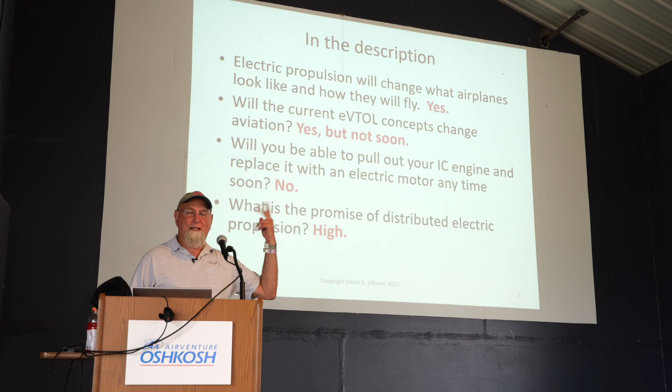In the description, I posed 4 statements, and I'm going to tell you the end so you can leave now if you want to and go do something more useful. But I said electric propulsion will change what airplanes look like and how they'll fly. I think the answer to that is a resounding yes.

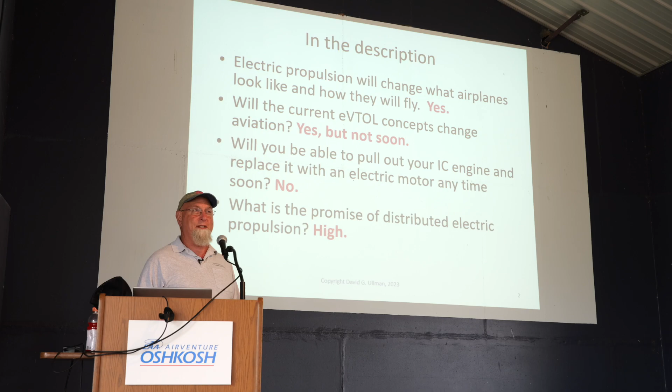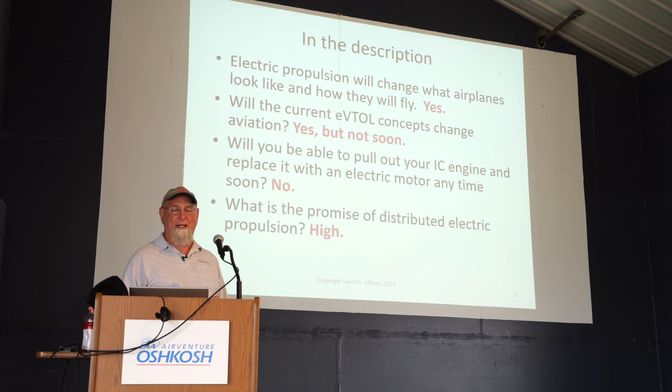Will the current eVTOL concepts change aviation? Yes, but not soon, and I'll explain why I say that. Will you be able to pull out your IC engine and replace it with an electric motor anytime soon? Well, you can sort of do that, but you don't go very far.

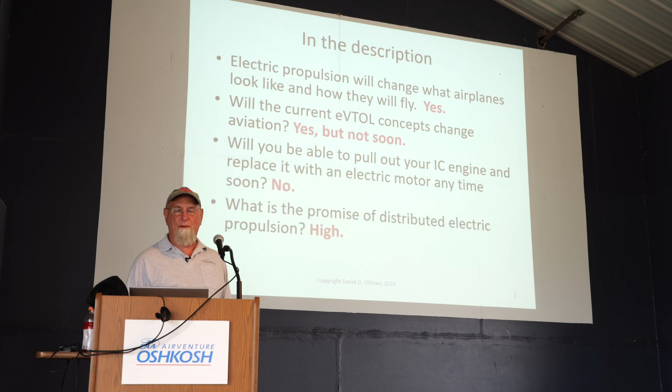And what's the promise of distributed electric propulsion? What I should have really written there was propulsion airframe interaction, because that's really where my hot spot is, as you'll see as we go through this. I'm going to make a lot of predictions.

My background: I've got degrees in aerospace, a PhD in mechanical. I worked at the Flight Dynamics lab way back when Orville and Wilbur were still there. I write textbooks on stuff, and I started playing around with electric aviation in 2009. I've been working with CubCrafters, and we'll get into that project a little bit, since 2019. I've written a number of articles, and I was a keynote speaker in 2018 at the Cafe Symposium, and some of this material is actually from that 2018 talk because basic science has not changed in the past 5 years.

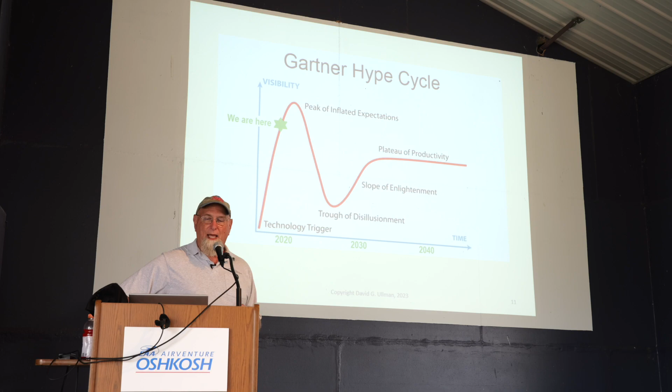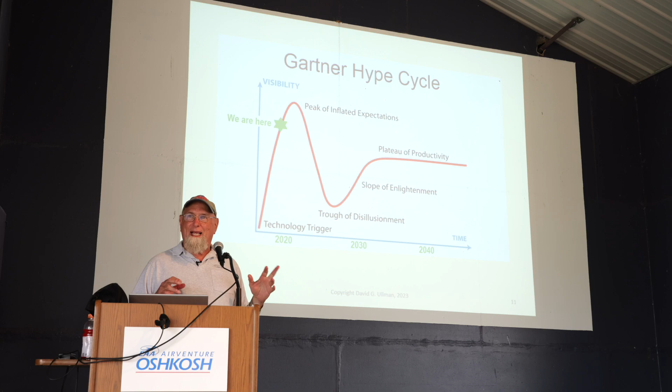And the reason I put hype is this is one of my favorite diagrams. It's by Gartner, a research organization, and the Gartner hype cycle is fairly well known. It pertains to just about any new technology. It says initially there's going to be a peak of inflated expectations. We can do everything, we can save the world. And then, of course, reality sets in as you really try to build it and make it work, and you end up in the trough of disillusionment. Then you slowly get enlightened and you come out someplace with a plateau of productivity. This may be fairly low, it may be fairly high, you just don't know.

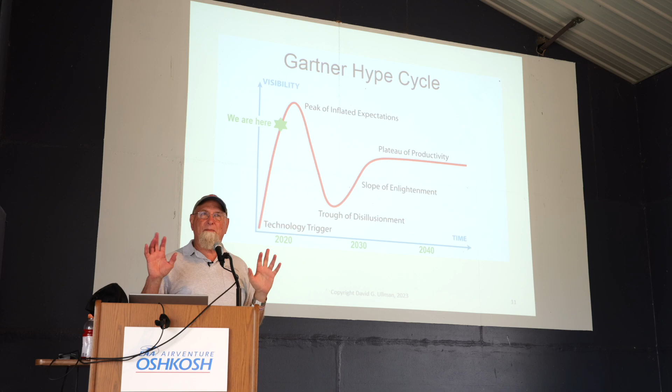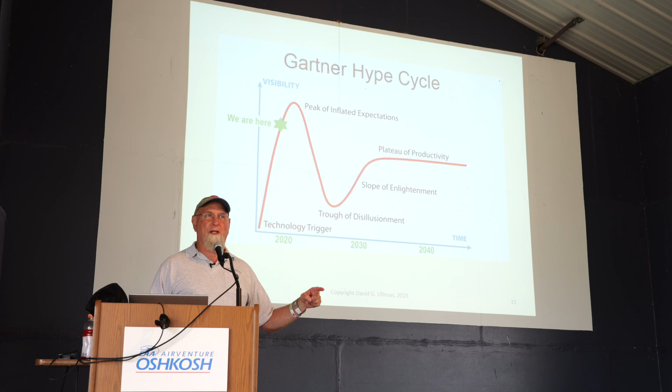I think overall we're at someplace near the top of the inflated expectations. And the stuff that I'm working on, which is propulsion airframe interaction, is actually much further down that slope, because people have just barely started looking at it. And I'll make that clear. So this is where the title comes from, and this is what I think's happening.

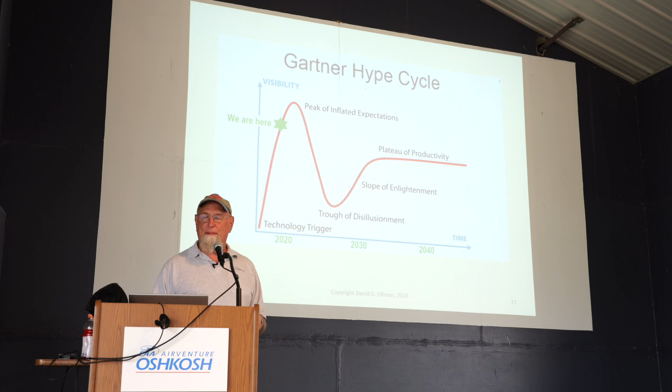By the way, if you go to www.davidullman.com and then go to my Aero tab, you'll find most of this information. People are looking at all kinds of different missions. UAM is the big push, which is now called Advanced Air Mobility, and both terms seem to be used. STOL enhancement is an area that I'm working on a lot now. Humanitarian missions involve getting in and out of tight places to bring people and goods in and out. People are looking at sport, we'll show that, and of course the military has lots of missions.

On the UAM side, Uber published this list, which goes over two slides, of what UAM means to them. This was published about six years ago, and at first I looked at this and I said, you know, this is a really dumb mission. Then the more I thought about it, I thought Uber did a really good thing, because they stuck a stake in the ground and said, here's something we can try to achieve. Be it realistic or unrealistic, who knows, but here's something we can try to achieve.

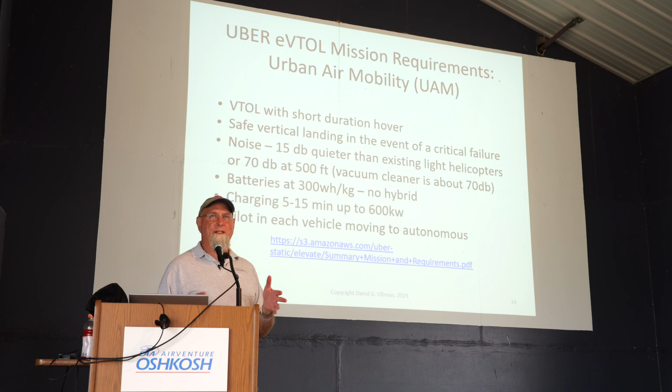One of them I want to point out in particular is the fourth one. They said that they thought at the time it would take batteries at 300 watt hours per kilogram to make this happen. Now, batteries, you've got to talk about how much energy is in a battery per unit weight. I'll get to that again in just a second, but 300 is still ambitious and we're still not there.

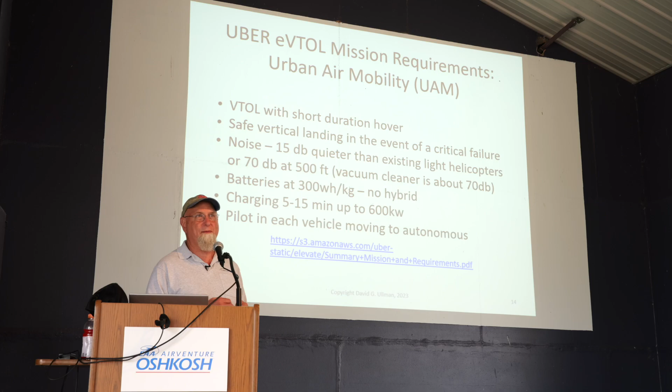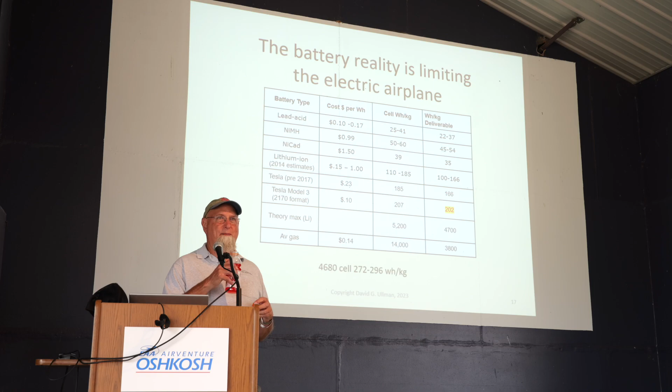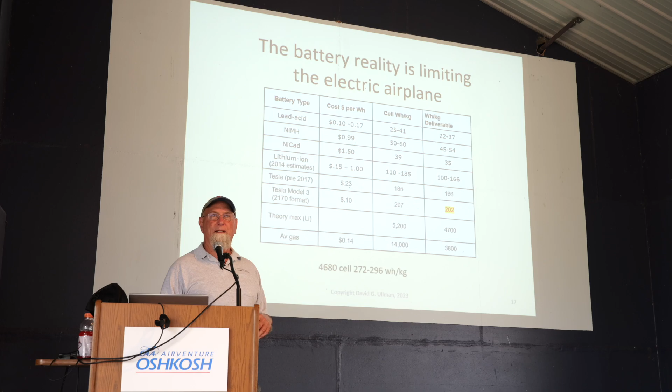You might notice that avgas is much more than an order of magnitude more dense in energy. You might also notice that the theory for lithium is an order of magnitude higher than where we are now. Keep in mind, battery research for running cars stopped in about 1905. As soon as the electric starter was developed by Bendix, electric cars went away. So we've had IC engines being developed for 130, 140 years. Battery development stopped for vehicles and then didn't start up again until the last 20, 30 years. So it's still early days in developing really good batteries.

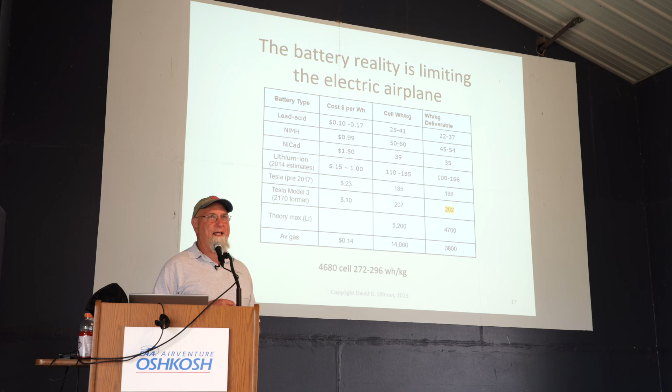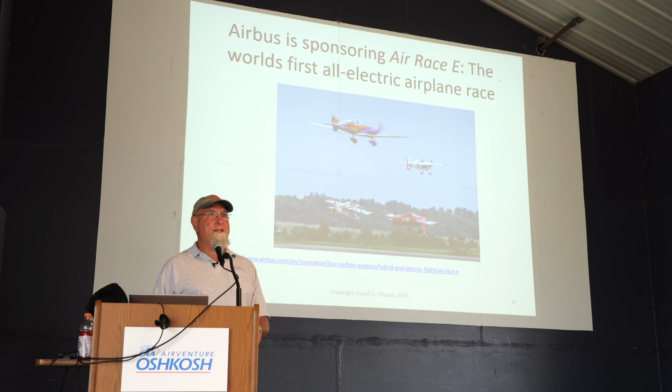Airbus is sponsoring the electric racers. This is a really good mission for electrics because they only have to stay up for 20 minutes, 15, 20 minutes. So you can just suck a battery dry to do the mission, and you're done. You can come down, recharge, swap the batteries out.

I don't know how this is coming along, I haven't seen them announce anything. Pipistrel, which doesn't have their own booth here this year, seems to be in a number of different booths. They've been marketing the Alpha Electro, which has about a 50-minute range, and they're selling it as a trainer. That's about right because typically you take somebody up for an hour in training. So they found a nice niche for taking out an IC engine, putting in electric, and saving money.

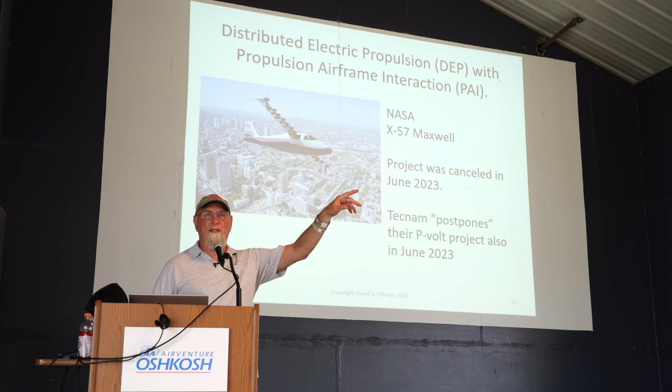One of the big pushes that got distributed electric going is the NASA X-57 Maxwell. To some degree, it does propulsion airframe interaction, meaning the thrust from the motors isn't just pushing it forward, they're interacting with the airfoil to change the aerodynamics. They don't do it in as dramatic a way as I think it needs to be done, but they were doing it. This project was canceled two months ago, and there's a vestige of it over in the NASA tent you can talk to people about.

Tecnam, who manufactured the fuselage they were using, actually had a program where they were doing what they called their P-Volt, and they shelved that also two months ago because the energy densities, they said, the batteries aren't there yet. They're going to shelve this for a while and come back and revisit it.

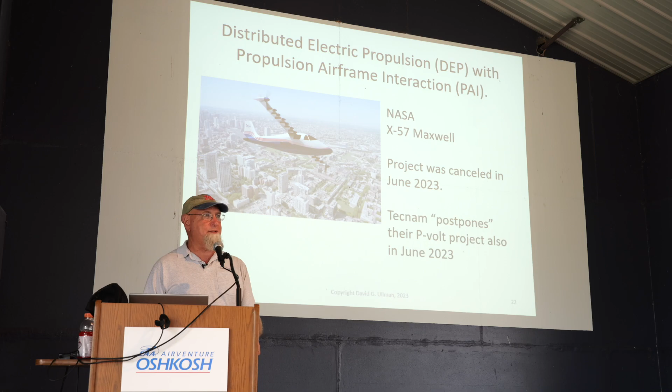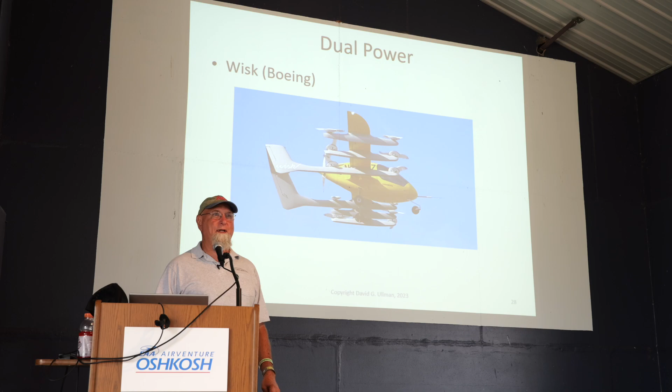There's a lot of them that are dual power. This is the Wisk airplane they flew yesterday, though this is actually one generation old. Wisk has a tent down here with Boeing, and they have another configuration where they've gotten rid of the motor to propel them forward after the fuselage on this. Horizon has another one where they have lots of ducted fans to lift, and their propulsion forward is another propeller in the back. People are doing all kinds of really interesting things. How it's all going to shake out, who knows?

One of my favorites, and I need to preface this, I'm a technologist, I'm a nerd, I really like elegant solutions. I like pushing the envelope of technology. So putting rotors on something to make it go up doesn't really thrill me too much, but doing something clever with ducted fans, that gets my attention. And I think Lilium has done that.

But they've got G1 certification. The European Aviation Safety Agency has blessed them, and they're trying to set up these airports so they can go from city to city doing the UAM.

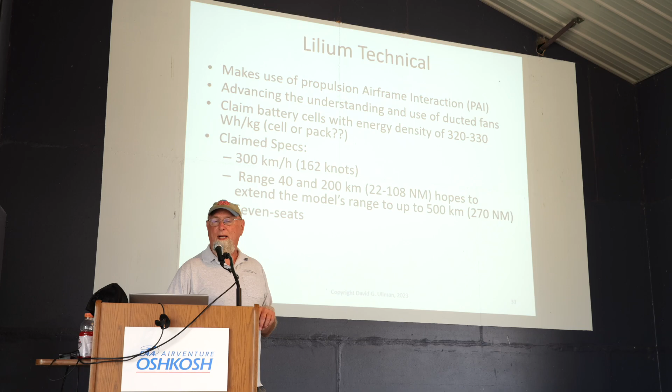What I think is really interesting about Lilium is they do make use of propulsion airframe interaction, PAI. They're pushing ducted fans. You'll see on the various projects I'm involved in, I use model airplane ducted fans because there are a lot of them out there and you can find the most efficient ones and use them.

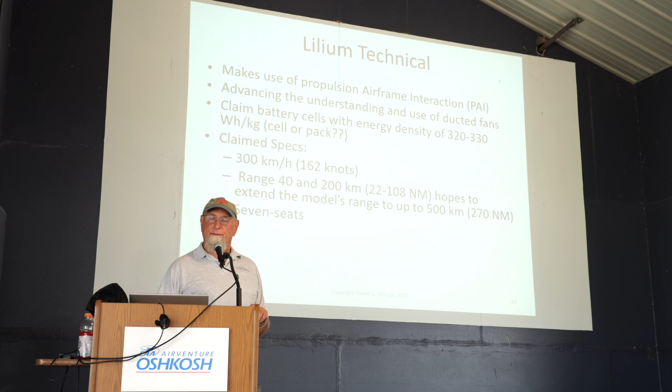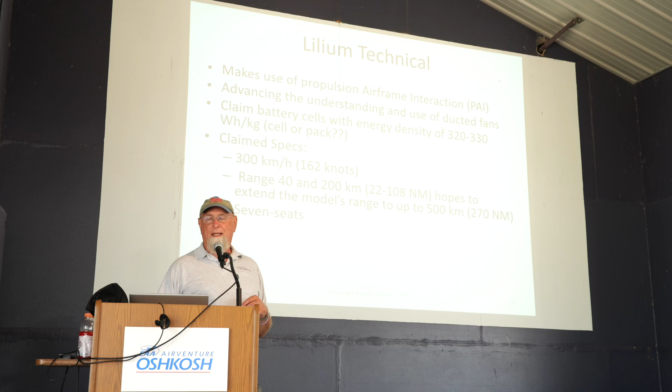They claim their battery cell packs have energy densities of 320 to 330, and I haven't seen those batteries yet. That's all I'll say about that. They claim different ranges in different places. They're shooting for a 7-seater.

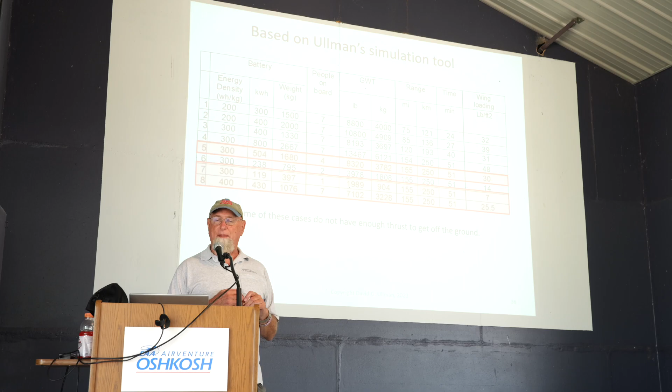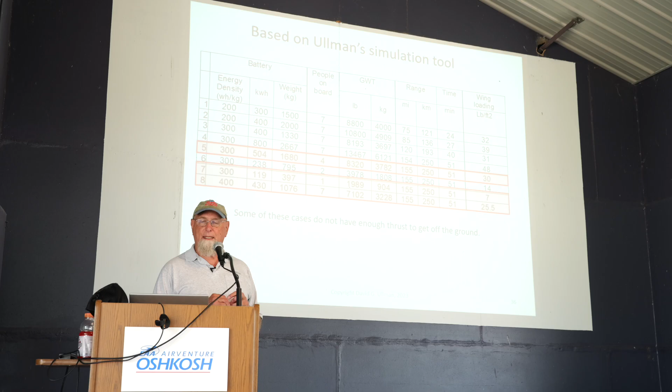Based on my simulation tool, I ran a whole bunch of simulations here. The only ones to bother to look at are the ones in red. The thing to look at is the number of people on board and the range going out. What I was trying to do was get the range to 250 kilometers, because that's what they claimed at the time I did this simulation. You can see it does all 250.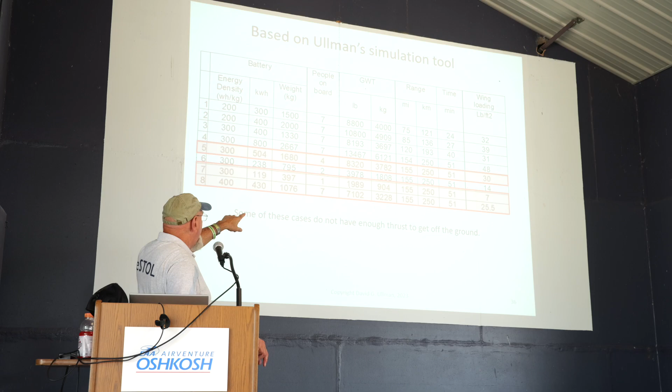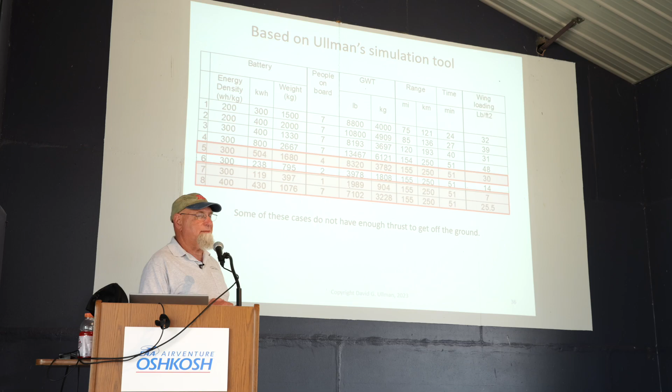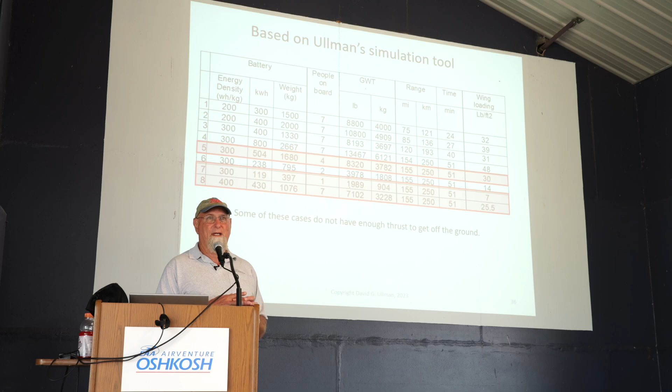But when you come back and look at the number of people and the size of the vehicle they might need with different density batteries—I've got 300 and 400 here—to get to 7 people and that range, you need energy densities of 400 watt hours per kilogram, and we're nowhere near that. So they've had to back down to some of these others that are more realistic. But it's going to come. Batteries were not researched for this kind of application for most of the 20th century, so it's going to happen.

Another elegant solution that's here is the BlackFly, and it's been here for 4 or 5 years. What I find interesting about the BlackFly is they don't rotate anything—nothing moves. The airplane rocks back so you can get it to go up, and then rocks forward so you can get it to go forward. It's a one-place vehicle, it doesn't have much range. It's going to be sold as a sort of a toy, and it's never going to be a real contributor to UAM or any of the other major uses we might have.

So this is my really quick survey of the different kinds of vehicles. There's over 200—I could have gone on for hours about differences between these, but I wanted to give you an overview because it helps with the rest of this talk.

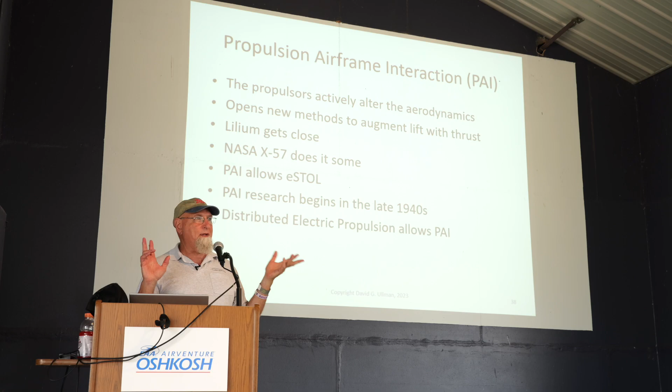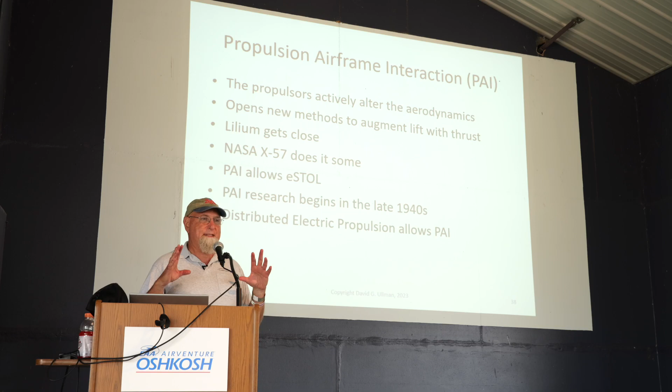So let's talk about propulsion airframe interaction. I've already mentioned it a couple times—it's where the propulsors actively alter the aerodynamics. Keep in mind, you can have little ducted fans or other kinds of thrusters, put them all over the airplane, and put the air where you want it. If you understand the aerodynamics well enough, you might be able to totally change how an airplane behaves. I think this is dramatically under-researched. I think the funding agencies have looked at quadcopters and other things that are technically simple but very limited. I think this is something that's just going to evolve.

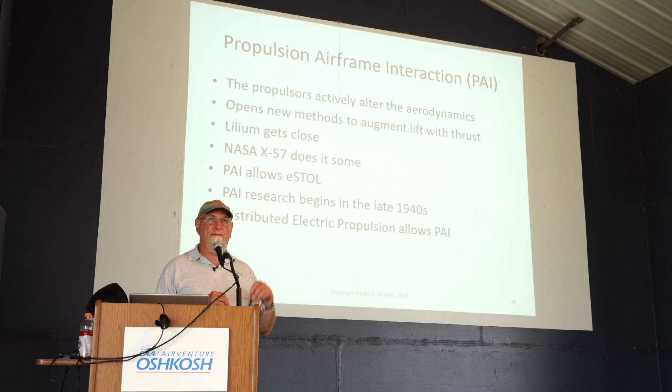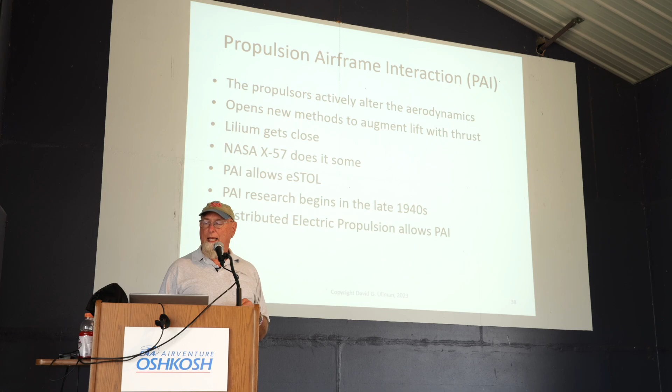Lilium does it fairly well. X57 does it some, allowing electric STOL in ways I'll show you in just a few minutes. And it's actually got some history, so this is not new with us.

The history starts with a guy named Willard Custer. A book just came out earlier this year called The Speed of Air, written by Willard Custer's grandson and a researcher from Georgia Tech. Willard's great quotation is, 'It's the speed of the air, not the airspeed.' What Willard came up with, and he was not an engineer and clearly not a businessman, is that if you take an airfoil and blow air across it, the faster you can get the air going, the lower the pressure and the more lift you can get.

He came up with this because he got caught in a tornado and ran into a barn, and the barn roof lifted off. He said, 'How did that happen?' And that was his great epiphany.

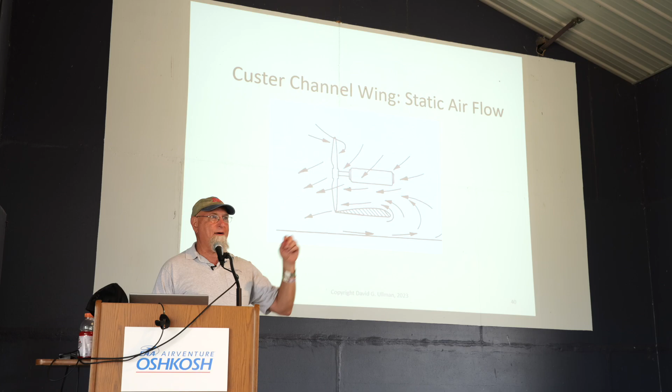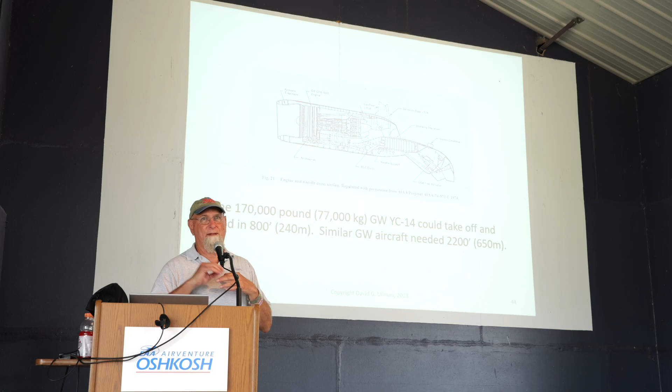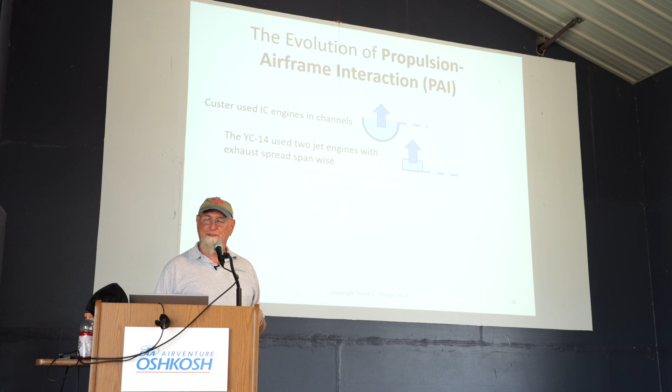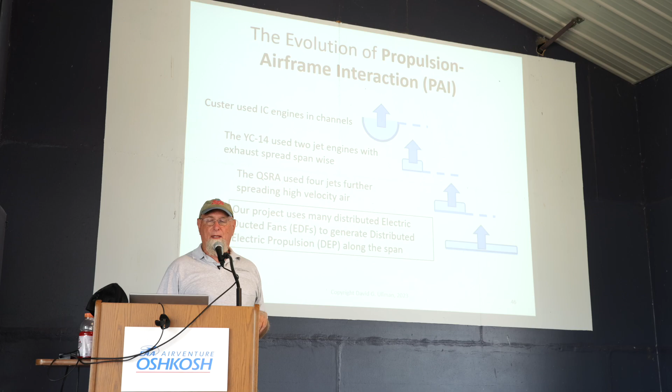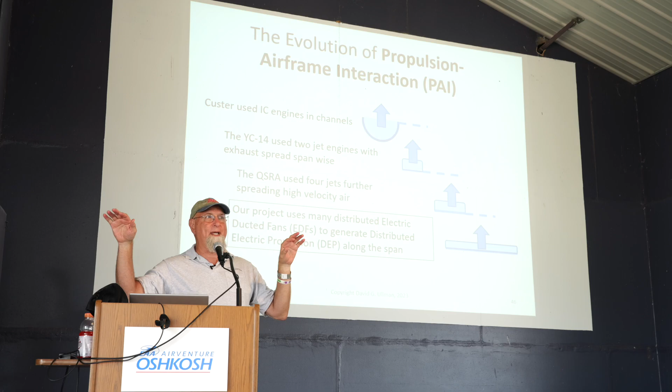What we're trying to do is what Custer tried to create: low pressure and lift in the channel where the propeller was. The YC-14 had a single propulsor inboard. The QSRA had 2 propulsors next to each other. And we're saying, well, if you can play with the whole wing, you can mold how you want the lift distributed on that wing if you do it right. I don't know that we're doing it right, but we're playing and we're making progress.

So this is some wind tunnel results from a couple of years ago, for a 4414, I think, airfoil. The bottom curve is a lift curve slope for just the airfoil in the tunnel by itself. If you're not familiar, this is how much lift you're getting non-dimensionalized versus the angle of attack. Typically this goes up until it stalls - the stall's the peak on the blue line.

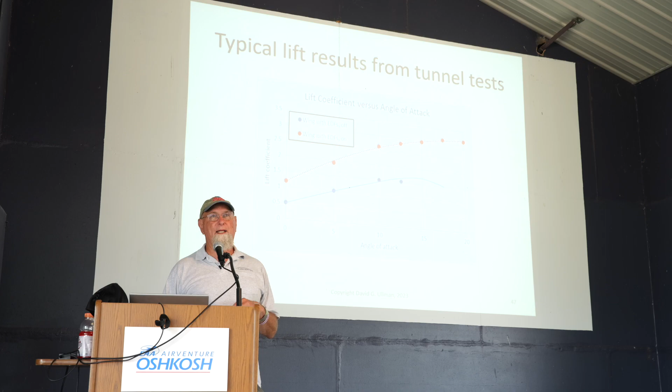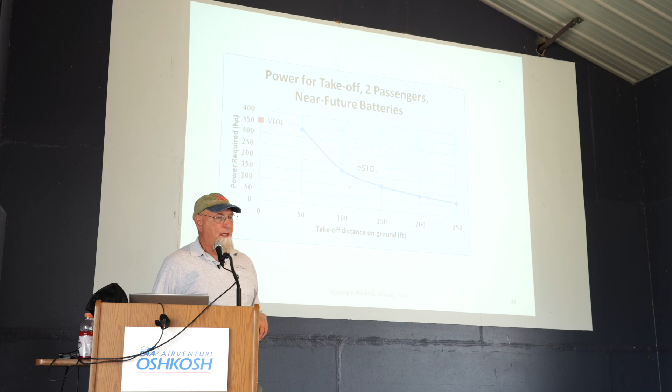There's a big push on this vertical - to get vertical takeoff and landing eats up a lot of power. It's a dramatic amount of power. But if you do a STOL kind of vehicle, where you've got a really short runway, you can use much less power. This is a figure that gives you some idea of what happens there.

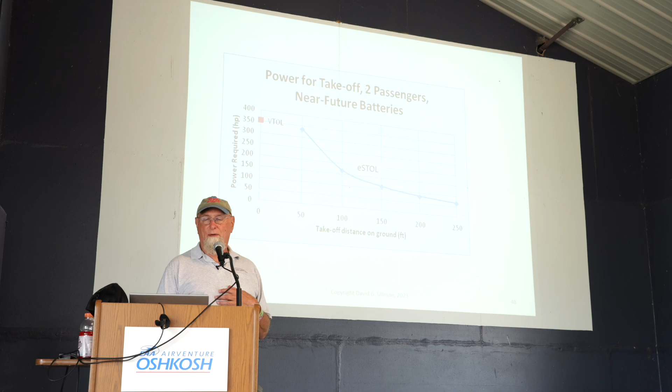So if we take a STOL vehicle, and this was just for 2 passengers and reasonable batteries, we get down under 100 feet for about half the power of the vertical. If you want to go for 250 feet, you can get 1/7 the power of vertical. So it says, well, do you really need to get vertical takeoff and landing? Or if you can get in and out of a soccer field or a football field, is that sufficient?

So I think, you know, helicopters have never taken over everything. Maybe you don't need vertical - maybe just short is sufficient. And that's the approach that we've been taking.

If you go back to the presentation I did about 5 years ago for the Sustainable Aviation Conference, I developed a model where I could look at all kinds of different vehicles. This is just a representative plot that's available. What it basically says is what's the range you can get versus the total energy stored in a battery, as you're carrying 2 passengers with near future batteries - 300 watt-hours per kilogram.

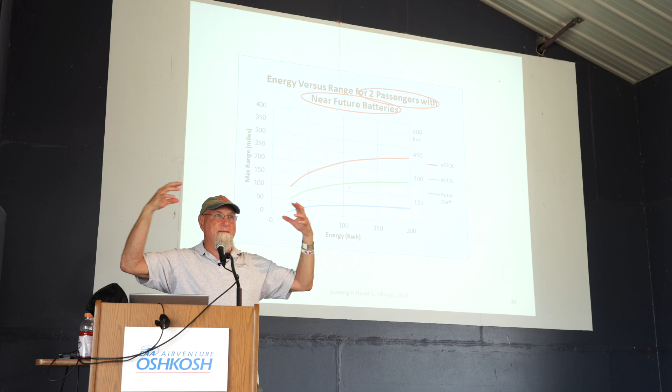Whether you understand this plot or not makes very little difference, but what's important is that no matter how big you make the machine for this particular situation, you're never going to get more than 50 miles out of a quadcopter. You're going to get bigger and bigger, but every time you add more batteries, it's going to limit you - it's almost like it asymptotically approaches a limit. Now this isn't true with internal combustion; these types of plots are unique for electric.

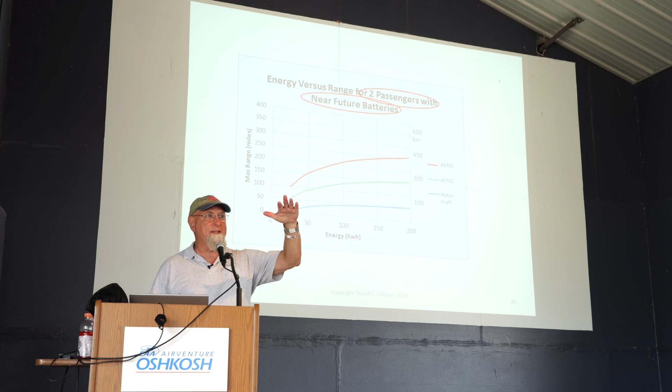And as you can see, if you do an eVTOL, where you use a lot of energy to get up and then use much less energy to go to your destination, it still asymptotically approaches something in the 100 mile range for this particular situation. Whereas if you don't have to do anything vertical, and you can just take off in a short distance, you again almost double the range. So it's just to give you a feel.

I've got a couple other plots here. I don't want to go into them, but I've generated plots for all the different numbers of passengers and batteries that are available now, versus batteries in the near future, versus batteries in the far future.

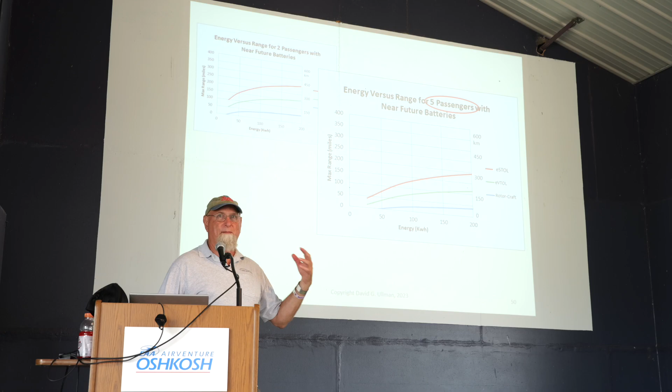And all the plots look the same. The message is real clear: if you want to go really far, you don't want to do a quadcopter. If you want to go further than an eVTOL, you ought to be looking at short takeoff and landing, because you can get almost double the range regardless of the size, regardless of the batteries, regardless of all these things. So I think all the emphasis on eVTOL is correct, but I think it's swallowed up the oxygen that should be going into some other areas.

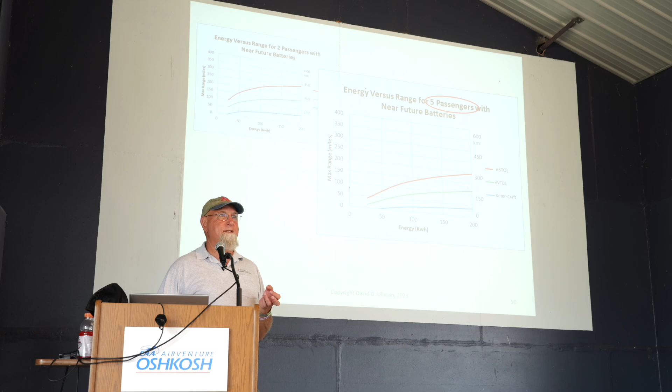Just my opinion. So now I want to switch hats. I'm taking off my EAA 292 hat and putting on my CubCrafters hat. So I'm now talking as CubCrafters.

One of the other things that came out of the Uber conference was I met Pat Horgan, the CEO of CubCrafters. Pat and I started noodling around with Vince Homer. Vince, did you ever show up? There he is. Do your hat again, Vince. So any question I can't answer, Vince will make up something, because he and I do a lot of work together. Anyway, at the Uber conference, Vince and I met Pat.

We started noodling around on what can you do with ducted fans and what can you do with leading edge slats, and can you do a synergy between the two? Out of this came a second patent, assigned to CubCrafters, that has the ducted fans embedded in slats.

This photograph right here is about 6 weeks ago during our flight testing. Len Fox was our test pilot. Len, stick your hand up. Len's a really good test pilot. The amount of data that he took was just amazing. I'll be reducing data for the next 2 months at least.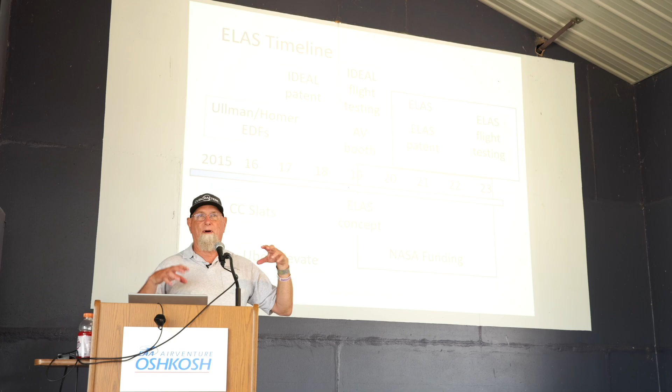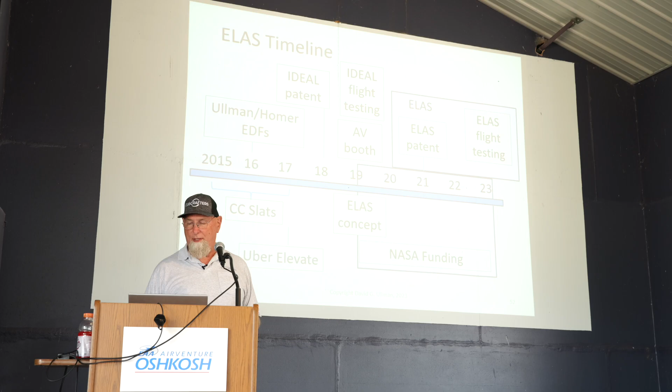Then we spin off this ELAS project. Also in 2019, Mr. Homer and I had a booth here. They had a tent for bleeding edge kinds of technologies, and we manned that tent for the whole 7 days and talked to a lot of people, maybe some of you. Then we pick up the NASA funding and get the patent on the combination of slats and ducted fans, and the flight testing was just in the last month. So this is sort of the timeline of how all this came about.

So the goal here is to leverage the propulsion airframe interaction to get eSTOL, and I mentioned football pitches—there's football pitches everywhere. They're for soccer, they're 330 feet long. If you can get in and out reliably at 330 feet without a big headwind, you can do a lot of things that you can't do at prepared airports, and that's what we're after.

The other thing we're doing that's a little bit unique here is that everything on this test airplane was off the shelf. COTS means commercial off the shelf. So the ducted fans, the controllers, the computers, the batteries, everything was off the shelf. Now, a lot of custom packaging and custom code for the software, but a lot of the other people are working on things where everything is custom, which makes development much more difficult.

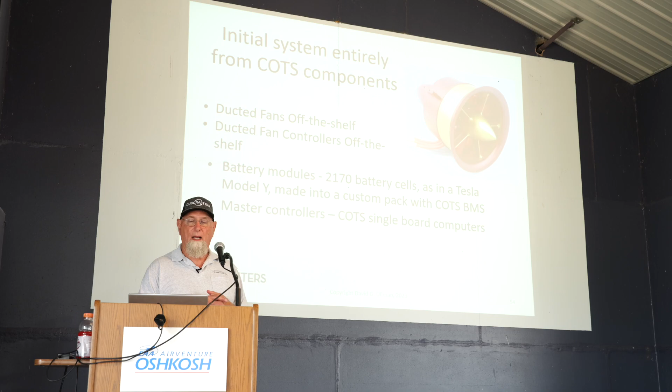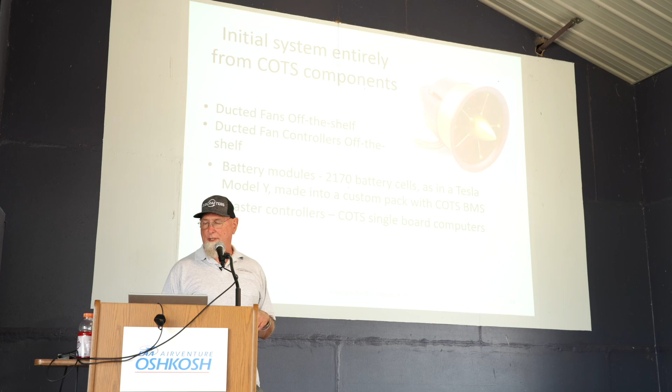So, to give you some idea, these are the ducted fans we happen to be using. They're 90 millimeter, commonly available. The controllers are out of a company in Bend, Oregon, that helped us reprogram the firmware, but that's all we changed. The battery modules are out of a Model Y Tesla, which are fairly safe and have been around for a while. The computers we're using are single board computers. It helps a lot to use proven stuff and not be reinventing all the wheels at the same time.

The beauty of working with CubCrafters is if this looks like it wants to head towards a product, and there's a market for it, it's an established company, we know how to get there. A lot of the other companies don't have this advantage.

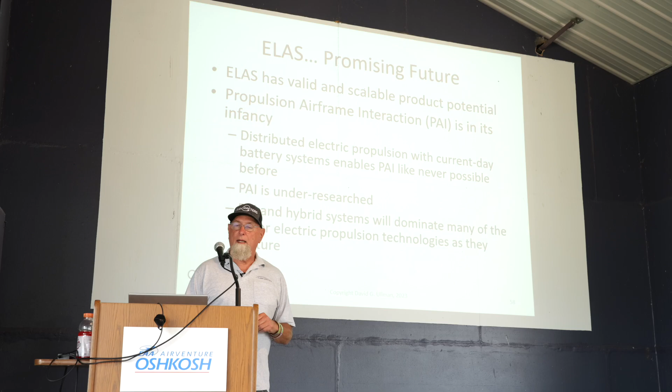We aren't giving any results yet because we're still evaluating. We think this whole thing about using the propulsion to change the aerodynamics really has a lot of potential. I'm sure it's under-researched. I know it's under-researched. We'll see what kind of system evolves out of this.

And that's pretty much where we're heading. So I want to recap, and these are the questions that I posed at the very beginning. It's the same slide. Will electric propulsion change what airplanes look like and how they fly?

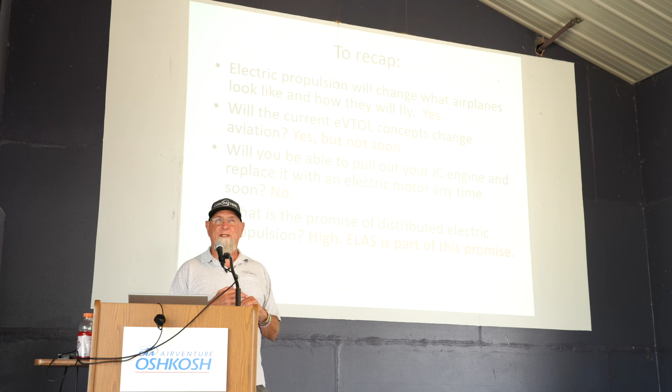Yep. Do we know what that looks like now? Nope. People are trying all kinds of really interesting things, which makes it really exciting as far as I'm concerned. Will the current eVTOL concepts change aviation? Yes, but I don't personally think it's going to be that soon because of the battery limitations. Just a little rule of thumb, batteries are increasing in energy density at about 7% a year. Lots of people have lots of promises and there's lots of alternatives to batteries. Something will happen, but it's happening slowly.

Will you be able to pull out the IC engine and replace it with an electric motor anytime soon? You can, but you can't get much range out of it at this point. So is it something you want to do? Probably not yet.

Is there a promise of distributed electric propulsion? It's really high, especially propulsion airframe interaction. I think it's really high, it just needs to be researched more. I think we're entering a second golden age of aviation. I think airplanes are going to change. When we come back in 10 years, there's going to be a lot of different things we're going to be looking at. Is that going to get down to the guy building or the lady building something in their garage? It may well. It may well. I don't know.

So that's my prepared talk. And I figured with an audience this big, there'd be an awful lot of interesting questions, so I'm willing to take a crack at them. Stick your hand up, I'll repeat the question and answer it as best I can.

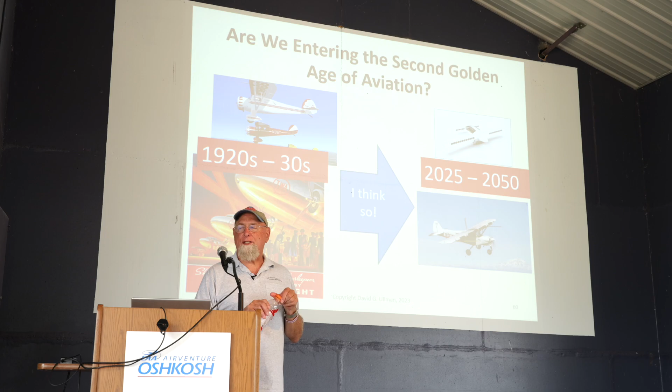Does the weight of the battery, like for the Tesla Model Y, impact the weight of the aircraft? Her question was, does the weight of the batteries affect the performance of the aircraft? One of the beauties of our approach is we only need energy for taking off and landing. We're not cruising on it.

So our batteries can be very small because they don't have to store much energy. But once you say you're not only going to take off and land on this, but do your whole mission on it, now the weight of the batteries can be a substantial driving percentage of the weight of the vehicle.

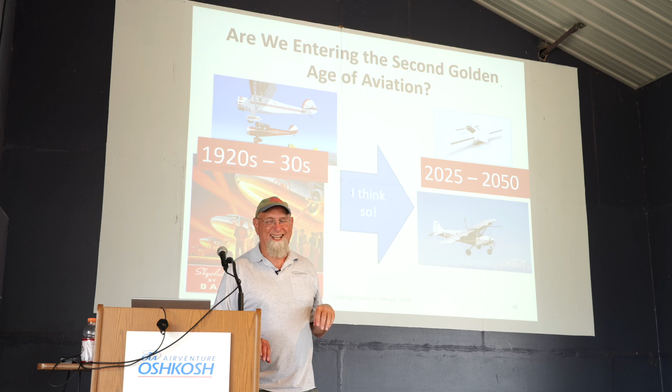Good question. Sir? You haven't mentioned any wind tunnel testing. I would imagine that with wind tunnel testing and modeling, you can figure out placement of your ducted fan. His question was, I haven't mentioned wind tunnel testing. How many of you came to my talk yesterday on wind tunnels? Yeah, okay, so there's a whole bunch. So a lot of wind tunnel testing.

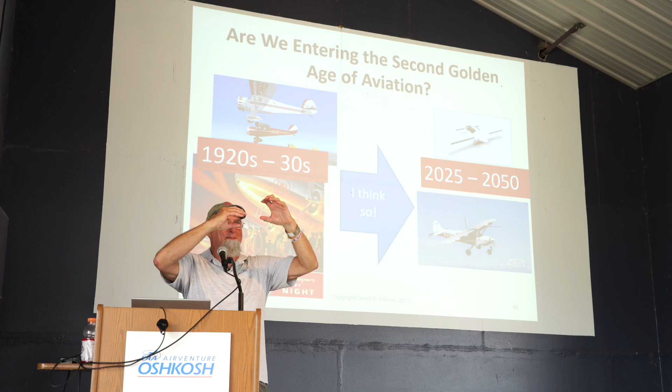Some of the things, if you think about this, let's say you want to put a ducted fan in front of a wing so it's blowing air over the wing. Do you put it really far in front? Close? High? Low? Do you tilt it? Who knows? There's no theory on this. You can do computational fluid dynamic models, but you can also do wind tunnel models, and we've done a lot of both.

Sir, be really loud so I can hear you. What's your opinion of the IC engine and range extender, and how do you put your thoughts about optimizing the design on that hybrid electric hybrid? Are you thinking of the push-me-pull-you airplane? Just using an IC engine to get more range in an EV car. His question, I think I understand it, is what do I think of putting an IC engine in like an eVTOL to generate electricity so you have sort of a hybrid?

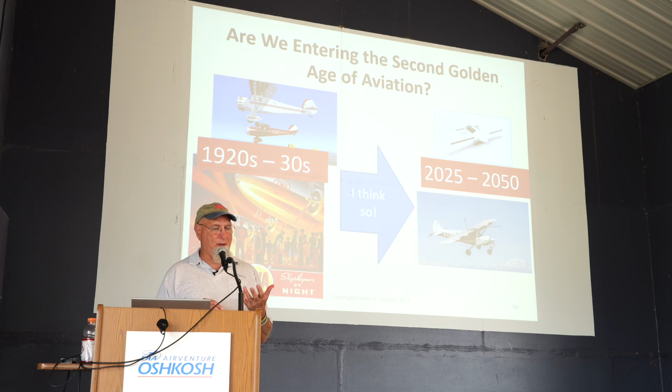People are looking at that. There's all kinds of different ways you can get the energy needed. To be honest with you, all our work has been on the aerodynamics. We're doing nothing on battery development, nothing on ducted fan development. There's lots of people looking into these combinations. So I don't really know much about it, to be honest with you.

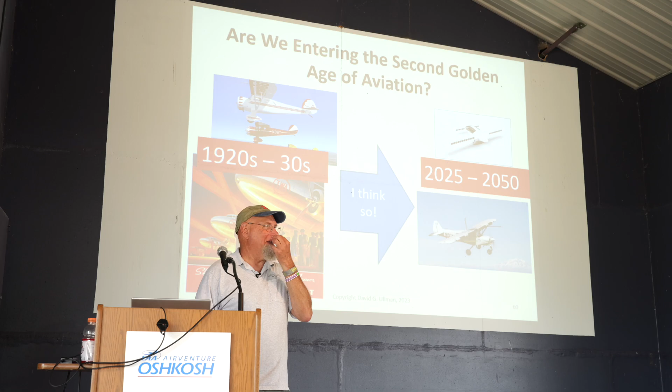Professor Ullman, hello. I would like to comment that there is a practical airplane being flown every day where I live that's electric. It's a sailplane that's towed up to altitude, and the electric motor is used to give them extended range to an airport for safe landing, which I think is an absolute perfect solution. Right, and I didn't...

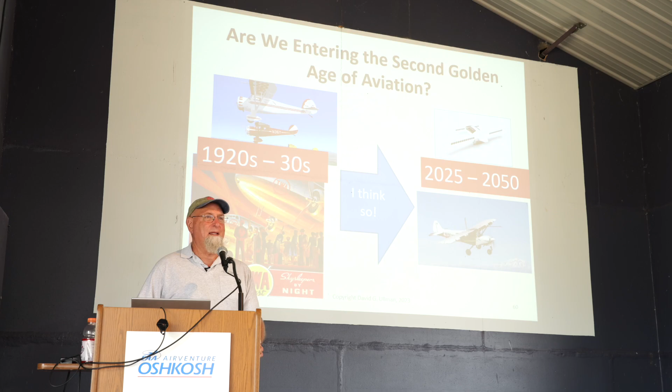His point is that there are electric sailplanes. You tow them up, they fly, and if you need power, you can pop up the electric motor. It'll help you get to a new altitude, help you find lift. There are some unique small places where electric airplanes do work and make plenty of sense now, but that's such a small niche of what's being looked at, so I didn't cover it. But your point's very well taken.

Sir in the red shirt. So you're using these fans to shorten the takeoff, and once you get up to cruise, you just turn them off and they go to free wheel. How does that affect the drag of the plane normally? Is there any kind of plan to retract these at some point, or what do you do with the fans after you take off? His question was, you've got these slats with ducted fans in the wing, and what do you do with it after you take off? Do you retract them? Do you just turn them off? The answer is yes.

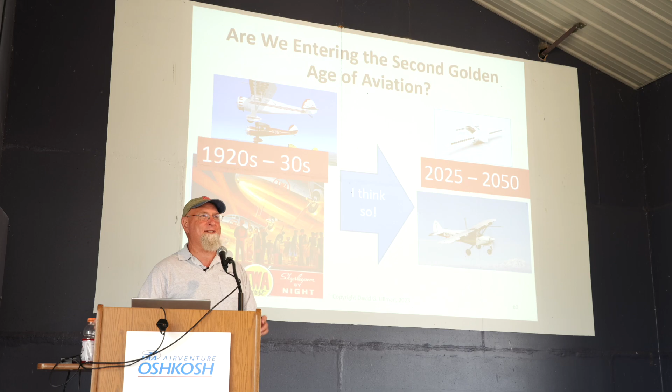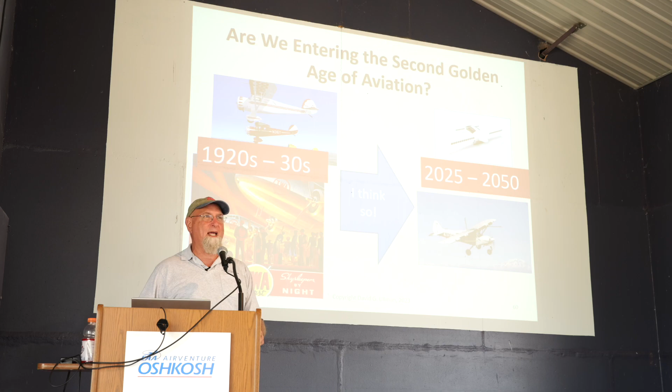It turns out they're not as draggy as they appear, number one. Number two, we've had discussions about retracting them and doing various things because it is a penalty, you can't help but be. In the long term there are lots of options. One vision we have right now is that these things can be effectively mounted on an existing airplane—take any airplane out here and stick these on the wing. So you can't do the retraction there, but there's lots of games that can be played that we haven't even begun to explore.